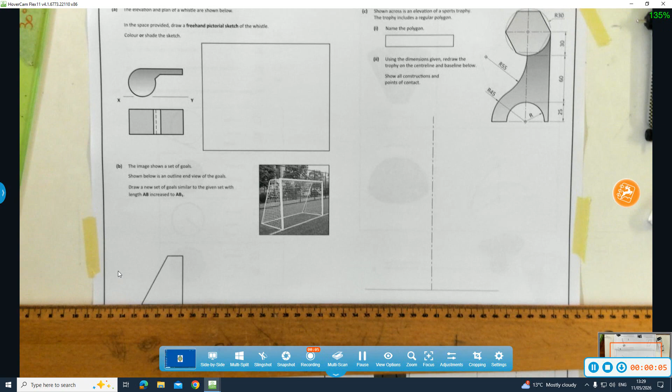So 2024 paper question 2 for Junior Cert Graphics. The elevation and plan of a whistle are shown below. In the space below, draw a freehand pictorial sketch of the whistle, colour or shade of the whistle.

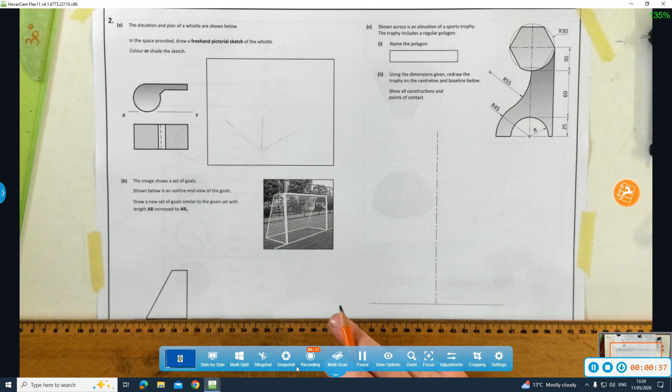Okay. So for starting these pictorial sketches or 3D sketches, I always start with what they call the bird's foot. Okay. So a straight line down, roughly 30 degrees to the left, 30 degrees to the right, and we can work off of that then. So anything that goes to the left goes parallel with this one, anything to the right goes parallel with this, and our straight lines up. So we're just drawing in our whistle here then.

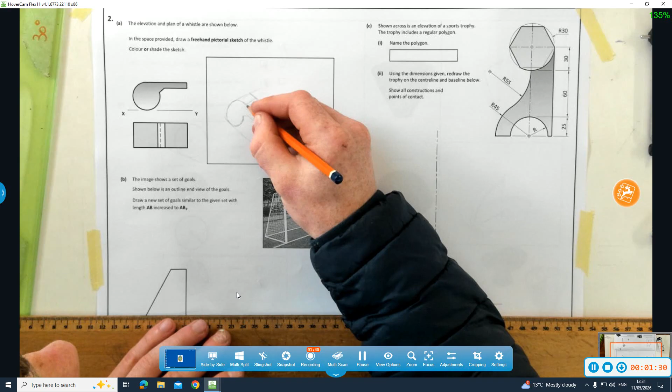Yeah. So again, you can colour or shade that one there yourselves as well.

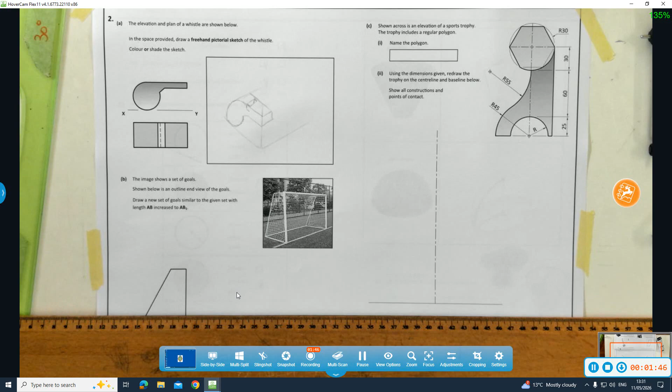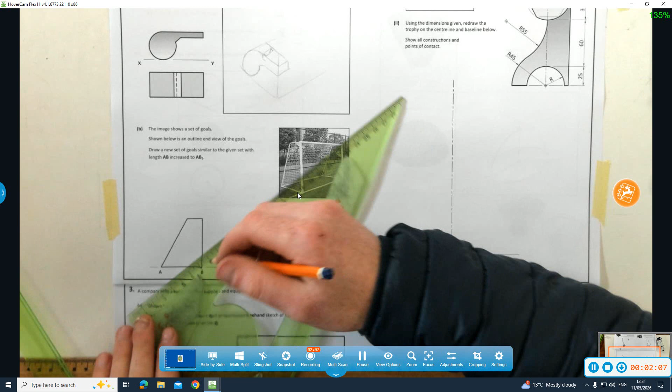So part 2, the image shows a set of goals. Below the outline of the goals, draw the new goals similar to the given set with the length AB increased to AB1. So what we do for these questions, we join from the corners, so from A out through these two corners here, so up here, and from A out to this corner.

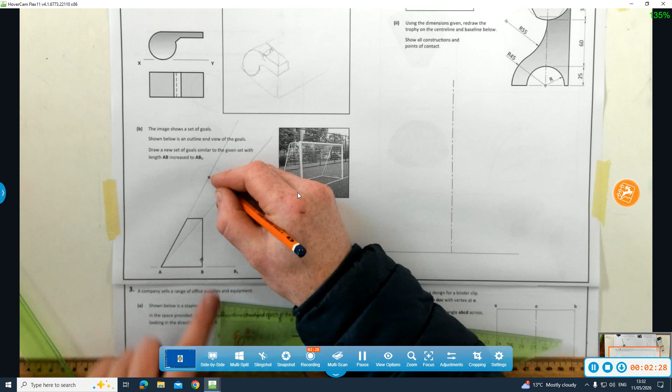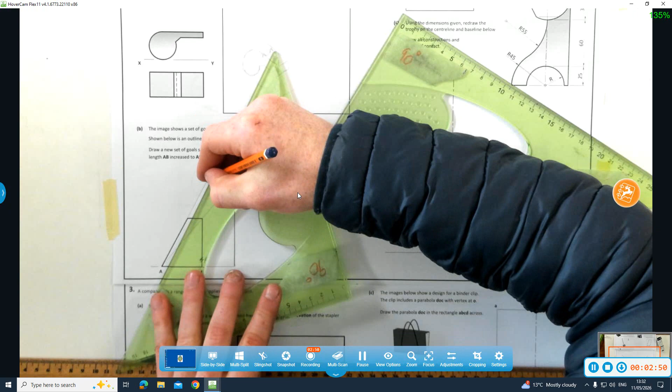From B1 then we go parallel to whatever we need to go parallel to. In other words, we need to go parallel from here straight up till we hit this line, and we go parallel to it here, and that gets joined back to A there. Straight up. Now we're going parallel to this top section. Here, and this gets joined back. So that's those goals there extended.

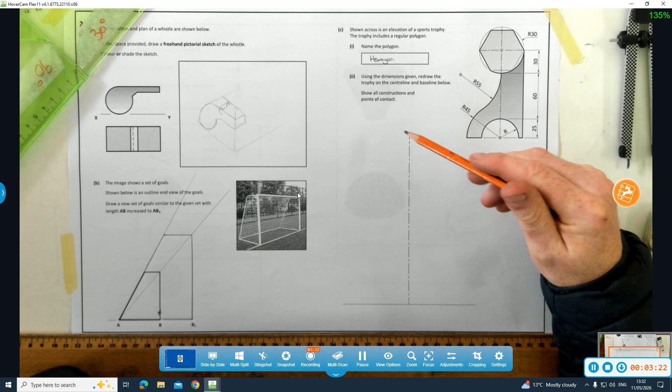Shown across is an elevation of a sports trophy. Trophy includes a regular polygon. Name the polygon. So 1, 2, 3, 4, 5, 6. It's a 6-sided shape, so that means it's a hexagon. Using the dimensions given, redraw the trophy on the center line and baseline below. Show all constructions and points of contact. Okay.

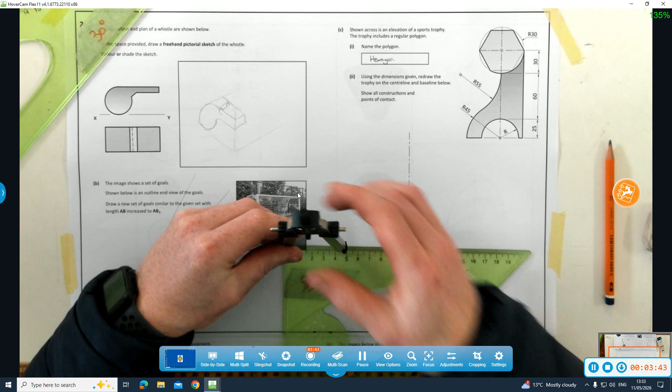So they give us the baseline here, so we have to start with this baseline, right? It tells us there anyway that that's a radius 45, this first curve here, okay? So we're going to start off with that anyway, our radius 45. So from the center here, radius 45. Okay.

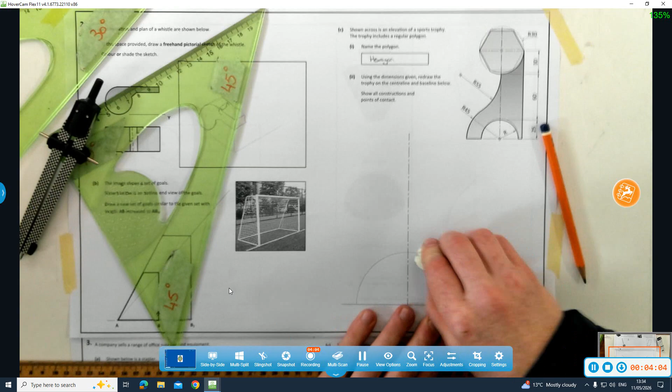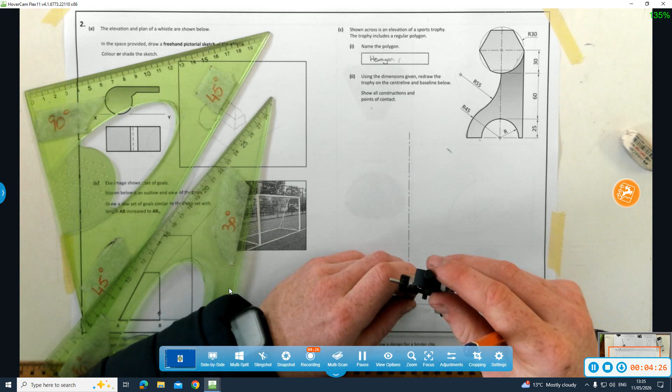I'm incorrect there, lads. It's radius 45 for the outside circle. So it's a radius 25 here, look. Gives us the height of this 25. This one outside here is a 45 for this curve here. Okay, so it's a 25 first of all. So that's our first circle, okay? I'm going to draw in these circles here because it might make it easier for us to see what's going on. So there's a circle there. There's a radius 45 there, and there's a radius 55 in here.

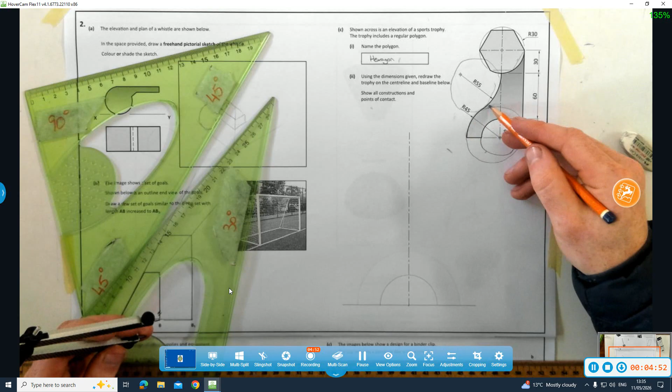Okay, if we want to find this over here, so right, there's a radius 45 inside here. We're given the center point of it, same here, so we can go 45 from this one, but it's not a full one. So 45 on the compass. From here we can draw this in nice and lightly first of all, that portion of it, okay? Now, if we were to draw a straight line from here to here, it's 45, and we will continue that line on, that will give us the distance from here into the center of this one.

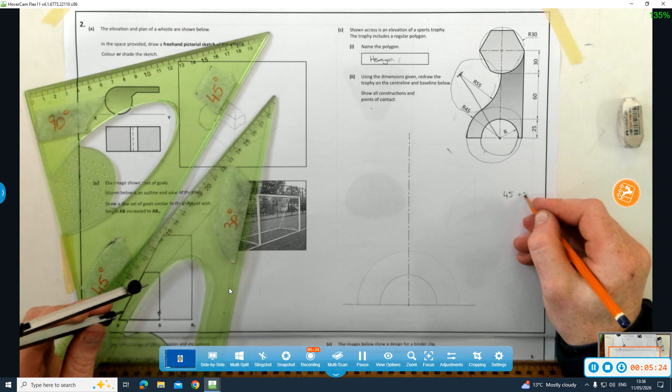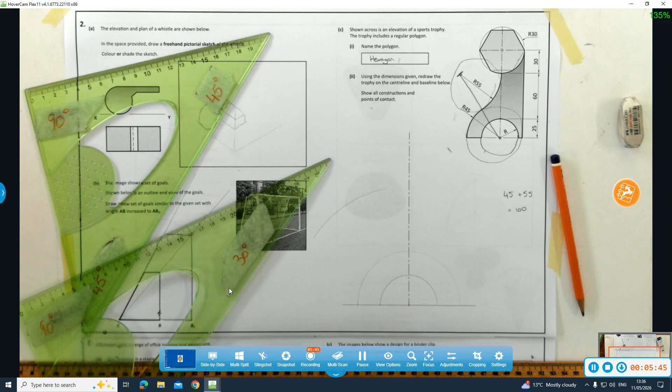So it's going to be 45 plus 55, okay? So we're going to be setting 100 on our compass, and we can swing it from this center down here. Okay, so that's what we have so far.

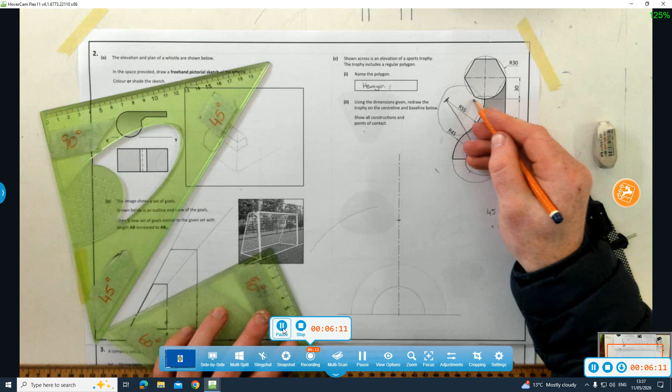If we look at the drawing then, okay, we can find here where this radius 55 circle touches this center line. It's 60 and 25 from the base, okay? So from this one here, it's 60 millimeters, that point there. So that's there now. Alright? If we were to draw a straight line from here into the center of this circle, it's going to be 100. So I can get 100 on my compass this time. I can put the point of it down here. So we can arc. Where they crossed is the radius 55 center I'm looking for.

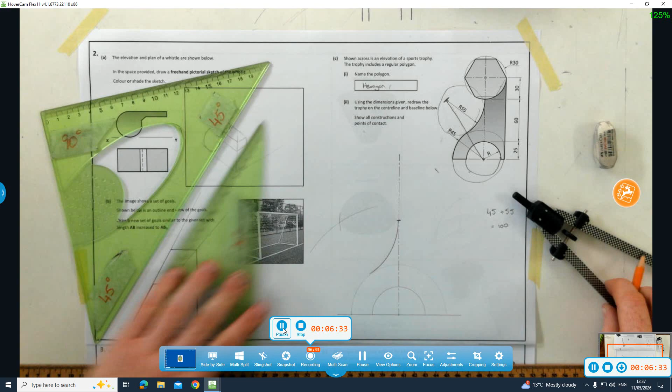Draw this in here. Remember, join your centers in for your point of contact. That's our point of contact there. And I can darken in this radius 45 here now as well, because I know how much of it is certain. Okay, so that's that part of it finished.

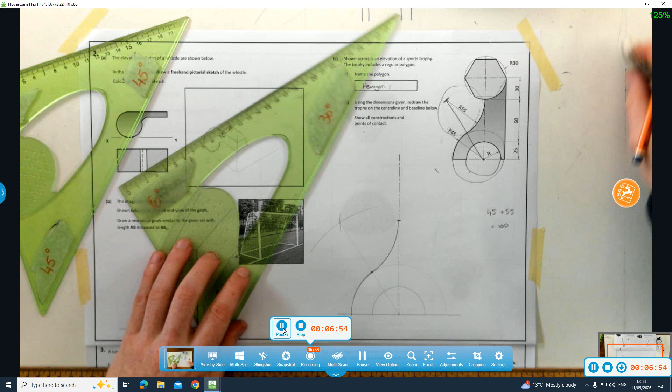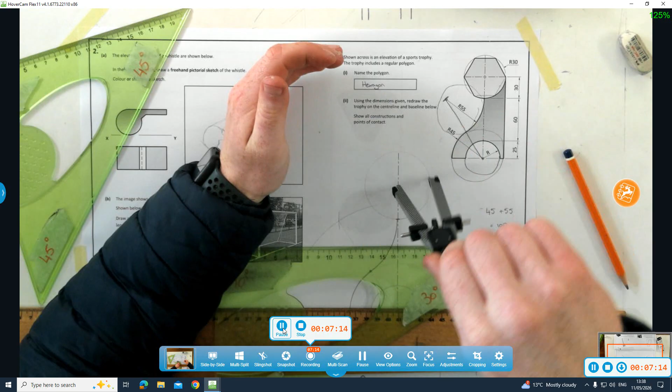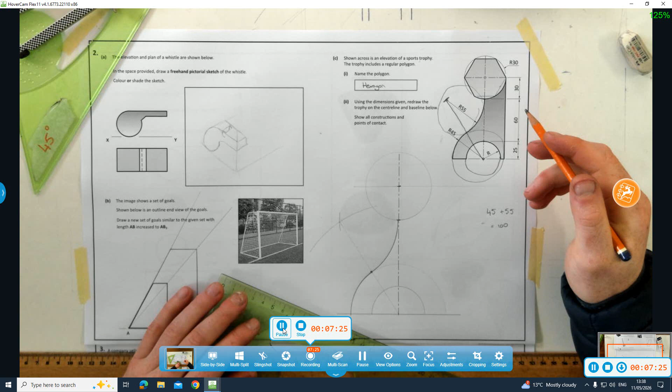Now we need to draw in our hexagon. So it's radius 30, so we're at this point, so we're going to have to step 30 millimeters up. And here we can get our radius 30 and draw it in. So we can draw our hexagon in that, yeah. So we're using our 30 degrees from our edges.

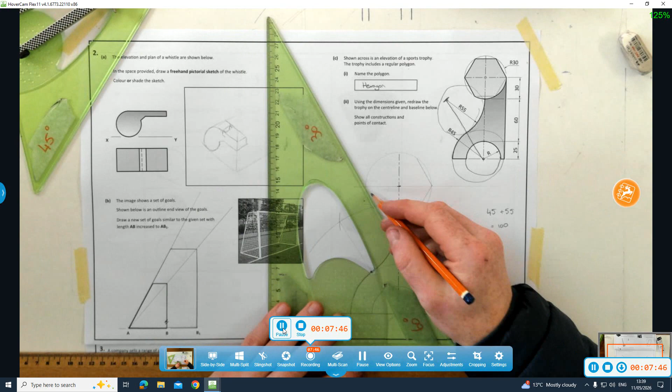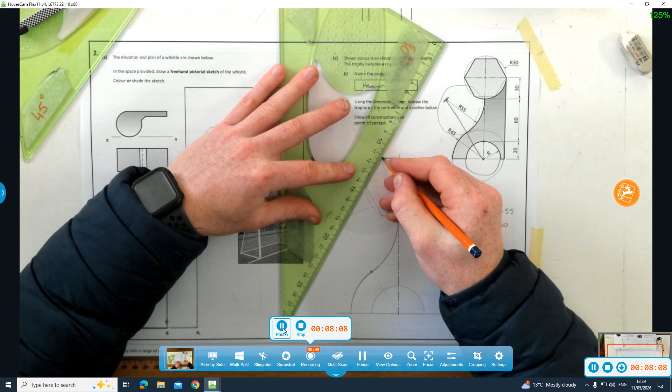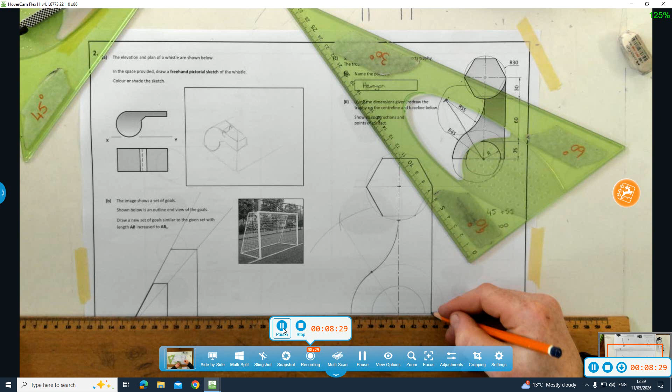So I'm just darkening here now these parts. And this point here comes straight down. And that's the bit we're left with here. That's our point of contact. Yeah. That's that question there on that page fully completed then as well.